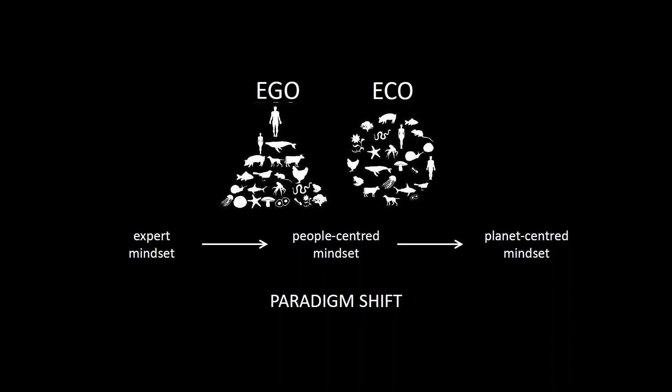And I just wanted to say that in this way, if we make a shift from the people to planet-centered mindset, it's also a way for all of us to survive on this planet. And this paradigm shift is really urgent and necessary. So this is it from my side.

And if you have any questions on how to implement the people-centered or planet-centered mindset in your projects or development of solutions, please ask now, or we can answer your questions at the end of our presentations. Thank you very much.

Okay, so good morning to all. I'm Cristina Becchio. I'm a researcher and I work at Politecnico di Torino in energy fields and also in indoor environmental quality fields. In order to present the methodology that we use in the Mobistyle project, I think I'll start from the last point that Dan stressed to us.

One of the main features of the Mobistyle project is the multidisciplinary approach presented in this slide. In particular, different expertise is required in the project: expertise in energy fields, in order to elaborate the relationship between energy use and occupant behavior, as well as the relation with indoor environmental quality. Expertise in health science in order to establish the relation between energy and individually based thermophysiology and other health parameters.

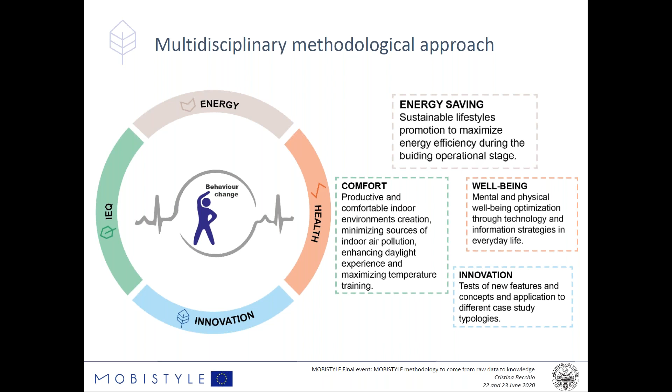This holistic approach is addressed to develop an effective methodology that combines three main research areas: energy, indoor environmental quality, and health. To stimulate users to perform more conscious actions, a combination of data collection, data analysis and elaboration, and tailored information via feedback to the user should be provided.

So these figures show the steps of the methodology. First, we have data collection to investigate the operation of users on energy systems in buildings. Then we have data analysis and elaboration in order to depict and understand human behavior, especially related to energy, comfort, and health, in order to obtain some performance indicators.

And then finally, we have improvement in terms of energy saving and indoor environmental conditions, and also human health and well-being is achieved through behavioral communication strategies, the so-called awareness campaign. So we have a new awareness. All of these steps are possible thanks to the development of new key performance indicators, the so-called KPIs, and also new ICT tools that are used to provide the information to the different users in the different demo cases.

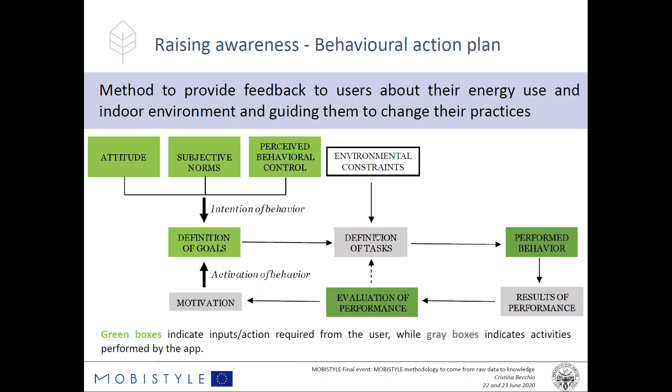One of the core activities of the Mobistyle project was the elaboration of the methodology that could translate monitoring raw data into knowledge for the user via feedback. Feedback which promotes healthy behavior, improves the lifestyle, indoor environmental quality, and energy efficiency. This is possible through the definition of meaningful KPIs, meaningful for the user, and also tailored behavioral action plans. In particular, the behavioral action plan definition is based on the main drivers of behavior according to the TPB, the theory of planned behavior: attitude, subjective norms, perceived behavioral control. So behavioral change goals are defined, and then personalized short-term objectives are translated into actionable tasks to be performed by the user. Actionable means that there is a behavioral change.

So in this way, data coming from the building, and in particular from sensors and from the users, are transformed into useful KPIs. These KPIs are translated for the users into meaningful and easily understandable information. At the same time, some variables calculated from monitored raw data are used to generate feedback to the user in terms of actions that they have to do. So users are encouraged to improve their behavior, to behave more consciously and to be proactive users of their buildings. So as an example, here we have the behavioral action plans for the Italian case studies, because we have a different behavioral action plan for the different demo cases in the Mobistyle project.

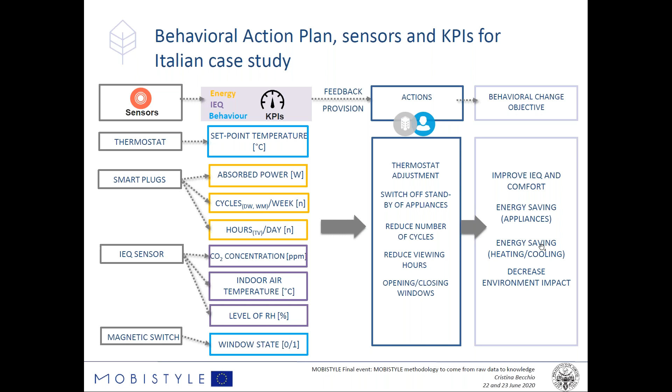So in the Italian case studies, we have information from sensors that are used to calculate the different KPIs in terms of energy, indoor environmental quality, and occupant behavior. These KPIs are used to provide feedback to users, and this feedback is translated into action in order to obtain the behavioral change objective. For example, the sensor is a thermostat, so the KPI is represented by set point temperature. Feedback provision tells the user that some thermostat adjustment is necessary. So the behavioral change objective in this case is to improve indoor environmental quality and comfort of the occupants, but also energy savings in terms of heating and cooling.

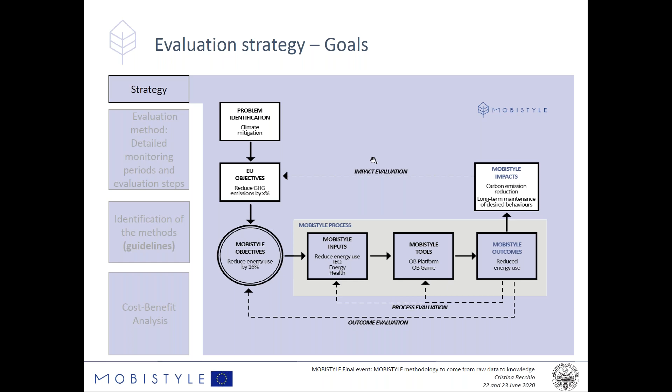So the other core activity of Mobistyle was the definition of the evaluation strategy that is shown in this slide. The evaluation strategy consists of three main phases: the outcome evaluation, the process evaluation, and the impact evaluation, which represents the last step. So here we have the timeline of the project, which is characterized by three different moments of monitoring. M0 represents the initial monitoring phase. After this, we have the benchmark definition, so the baseline definition in terms of parameters and KPIs. Then we have the second monitoring phase, in which we have feedback provision. At the end, we have an intermediate evaluation of the outcomes of the project. And then we have another monitoring phase, M2, in which we have optimized the feedback provision.

And at the end, we have the final evaluation. So the outcome evaluation assesses the effectiveness of the awareness campaign, as described before. The final objective of the outcome evaluation is analyzing the energy saving obtained in the different Mobistyle demo cases and quantifying their environmental impacts. This consists in a comparative analysis of the specific KPIs that are defined in the benchmark

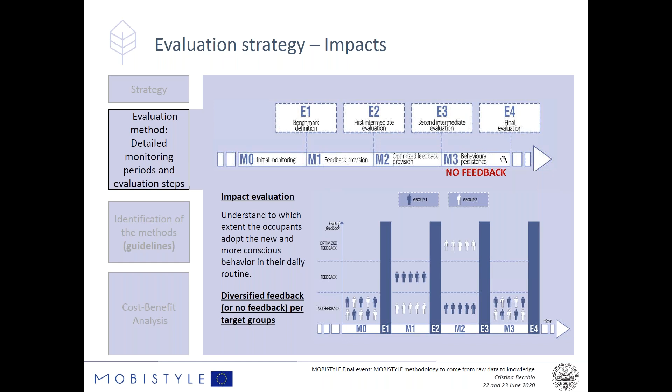So unfortunately, due to the COVID-19 spread, it's not possible to develop this last phase of evaluation. So we ended with the evaluation E3 as a final evaluation, as shown in the timeline of the previous slide. In order to develop the evaluation in terms of feedback, different descriptive statistics are used in order to quantitatively describe the current performance of the different case studies in terms of energy, indoor environmental quality, health, and behavior.

In order to assess the impact of the Mobistyle project, a cost-benefit analysis was developed. This is important because the assessment of human-centered intervention related to the use of energy consists in going beyond the energy savings that is the objective of the project, through the identification of all the market and non-market effects that the proposed ICT solution can generate. The cost-benefit analysis consists in defining, quantifying, and monetizing the impacts generated by the project. Thanks to the cost-benefit analysis application, also co-benefits are included in the evaluation. So the co-benefits represent the benefits referred to the society.

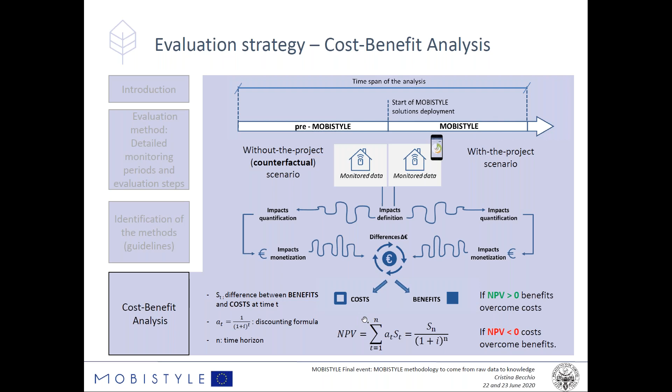So starting from monitored data of two equally long and comparable periods in pre-Mobistyle and Mobistyle period, impacts are quantified and monetized in the two different scenarios in order to compute their differences. So depending on the sign of the differences, extra costs due to Mobistyle or benefits gained thanks to Mobistyle are defined. So at the end, we have the calculation of the net present value. This indicator is calculated in order to assess the economic benefit brought by the project and so the effectiveness of the ICT tool that provided feedback to the users with the aim of changing their behavior in a persistent way.

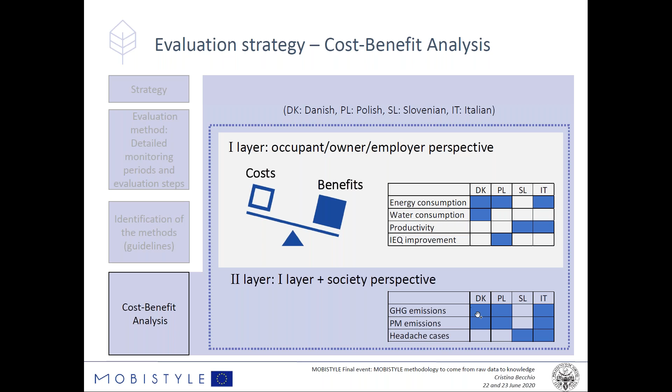In particular, four different cost-benefit analyses, tailored for the different demo cases, were developed. In particular, we have two layers of analysis. The first layer represents cost and benefits for the occupant, owner, and employer perspective. The second layer represents the perspective of the society. So, for example, in the first layer we have energy consumption that represents a cost or a benefit if we have a saving comparing the with-the-project scenario and the without-the-project scenario. The second layer represents the society perspective, and so, for example, we have the calculation of greenhouse gas emissions in order to understand if we have saving or not.

So, in order to close this presentation, in this final slide, I try to summarize the main aim of the project. So, the persistent behavioral change in the user.

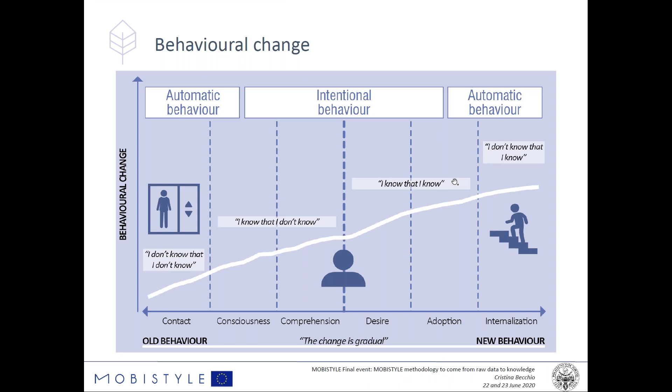Okay, so let's see. It doesn't shift, does it? Now I'm back to, oh, it's a bit slow.

Yes, here we are. So we should not forget that we evolved in more natural conditions and that we still are dependent on our environment. One way we cope with our thermal environment, with the temperature around us, is by behavior. And one of the main things we achieved by behavior is building microclimates, building houses, the built environment.

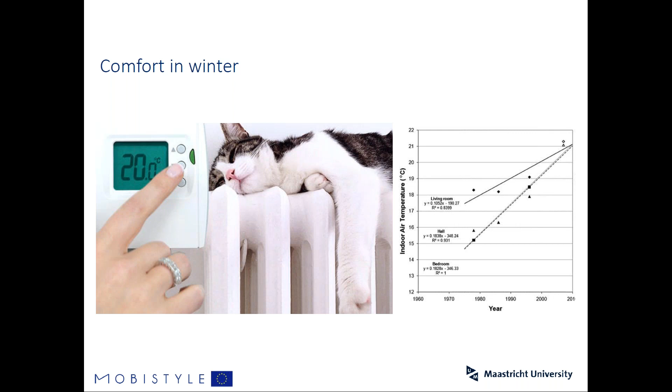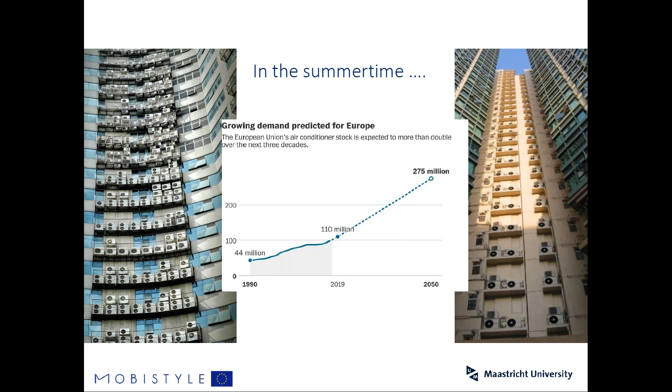And this is in wintertime, but in summertime, we're getting more and more fixed temperatures as well. And this has huge implications for the energy consumption in buildings. Here you see some of the expected growth in air conditioning. It's really something we should try to avoid. And one way to avoid this is to have more exposure to different temperatures, that's to say, to get into a dynamic environment.

I come to that. Parallel to these changes in comfort conditions, we see a huge increase in the metabolic syndrome, which is really linked to our westernized society, our Western behavior and comfort conditions. And that is not only, of course, temperature. Very important is our food intake and our physical activity. But anyway, it links to lots of metabolic diseases, from cardiovascular to diabetes, etc.

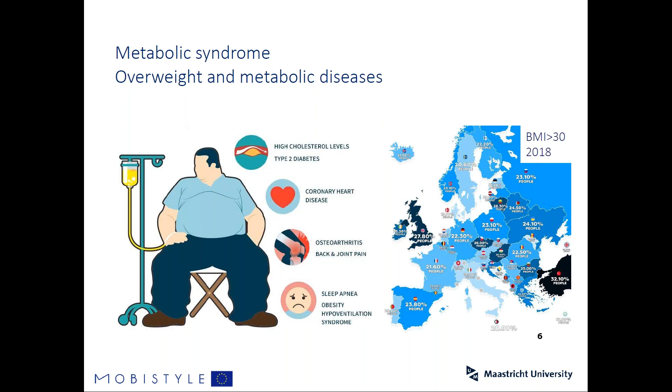So you can try to avoid overweight and related diseases by doing something about our energy balance. We get energy inside the body, and I'm really talking about the energy of the human. So you can do something by eating less or expending more energy through a higher amount of physical activity. And that energy balance is then linked to the weight balance.

I think this is clear to everybody, but not so clear is that you can also do something about it by looking at your thermal environment and expend more energy by being outside of your thermal comfort zone. I'll come to that in a few slides.

So we look now more and more at other lifestyle factors. Of course, the most important lifestyle factors are still food intake and, let's say, physical activity, but others like the ambient temperature is also an important one, we believe.

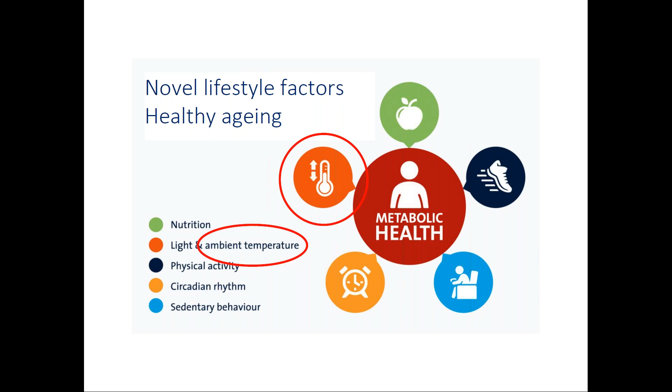So just 1 or 2 slides about the thermal physiology. I think that's important in order to understand that the human body has its own heat production. That's our metabolism. And of course, you need also to get rid of that heat, otherwise you would get higher and higher core body temperature. So the heat balance is important to achieve 37 degrees Celsius in our body.

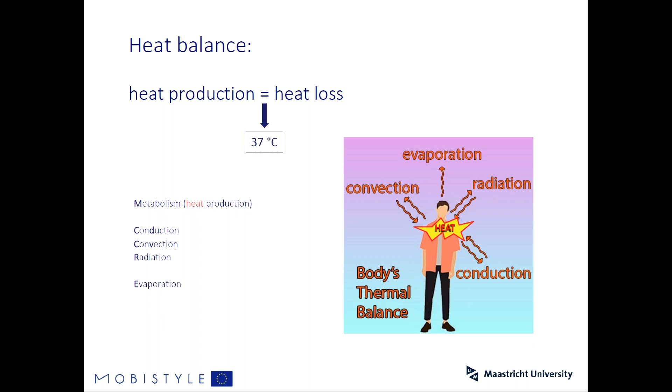Very important here is that we can have different means of regulation, and a cheap way to regulate our body temperature is by changes in the heat loss. So that we can do by more blood to the skin or less blood to the skin. So we change the blood perfusion, and that is for the body a cheap way. It does affect our cardiovascular system, so it is important. It has a cardiovascular challenge, so it's good to have some changes in perfusion, but it doesn't cost us extra energy, so our metabolism is not so much affected.

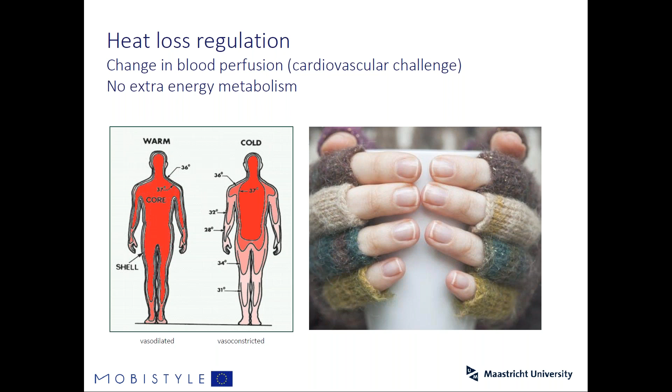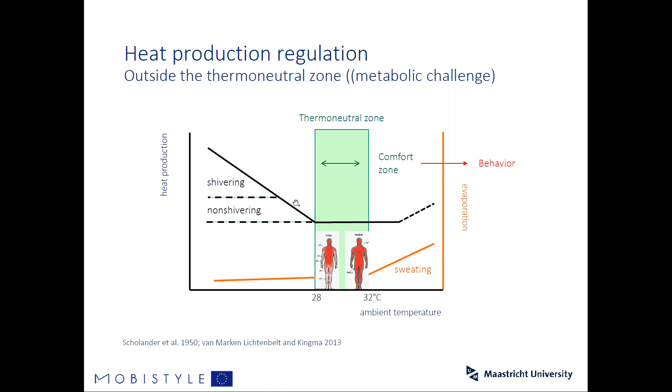So there are 2 ways to really affect your health in the body: by metabolism increasing and by changing the perfusion. So is comfort that good? Well, in natural circumstances, yes, of course. You had to save energy because there was not food available when we lived in the savannah in Africa. So we had to save on water and energy, and that comfort drives then our thermal behavior. But nowadays, in our modern society, everything is there. We don't need to have a lot of physical activity, and we're always in the same temperature. So now a slight discomfort may increase our metabolic rate again and get into more natural and healthy circumstances.

And moreover, very important, I didn't stress that, is the resilience is also increased by being exposed to slight temperature changes. So acceptable temperature changes also creates more resilience to more extreme conditions like heat waves. So we did a lot of research in Maastricht. We have special metabolic chambers, climate chambers, where we can measure the human energy metabolic rate in great detail.

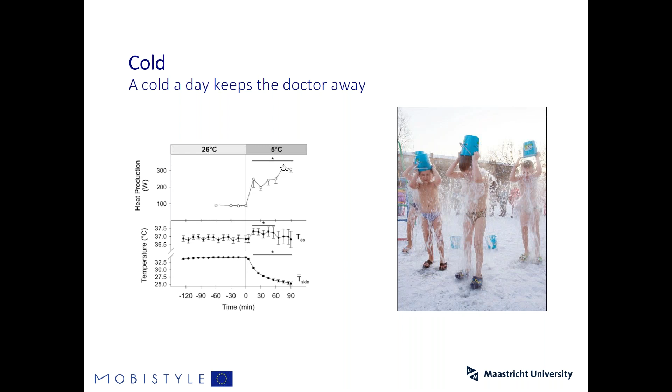So if we look at the cold, we can, for instance, increase our metabolic rate, as you can see here. We also change the perfusion in the skin. You see here the skin data. The details are now not that important, but with shivering, you can increase up to 5 times your metabolic rate. In this case, it's 3 times. But that's, of course, not so comfortable. But it's also possible, as you can see here, that prior to shivering, there's also non-shivering increase in metabolic rate. And that is rather comfortable.

And we also found out which tissue is important, because with the shivering, it's the skeletal muscle. But with non-shivering increase in metabolic rate, it's the brown fat. And we found out that humans have quite a bit of brown fat, and that's a very healthy tissue. It keeps us warm in the cold without being uncomfortable, and it is linked to a better metabolic profile.

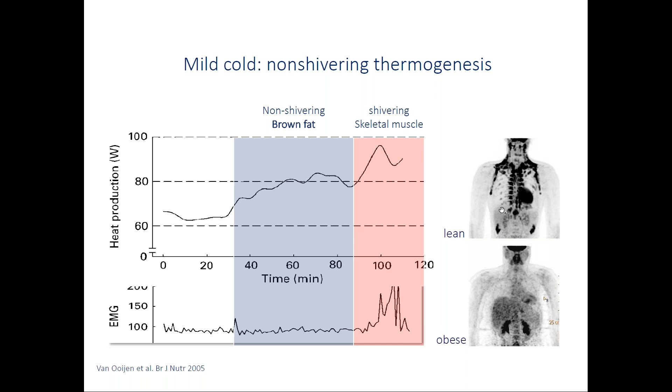So to make a long story short, because we did a lot of studies on this, we found out that if you're regularly exposed to mild cold, in this case 15 degrees Celsius, it's maybe not what we want in our offices, but just as an example, we see that we get an increase in this healthy tissue, the brown fat. And we see that the glucose metabolism is much better. The insulin sensitivity increases. So that's good news for diabetes.

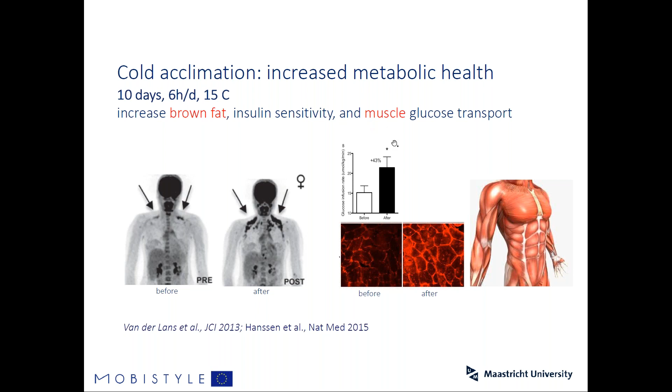And we see that also the muscle is involved in this. So it's really a systemic, whole body metabolic profile that is increased. So we see a lot of parallel with exercise. We all know that exercise is healthy, but we also have enough evidence now that being exposed every now and then to cold is also good for your metabolic system.

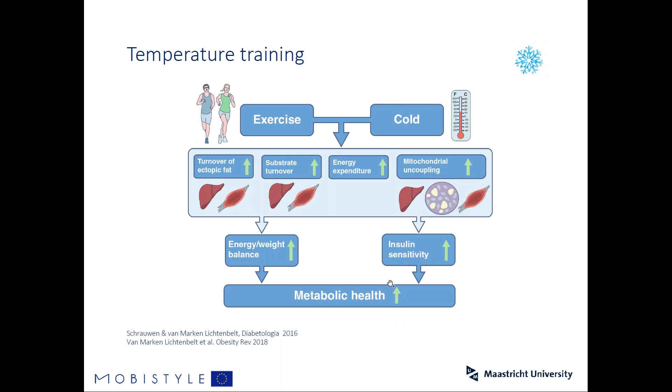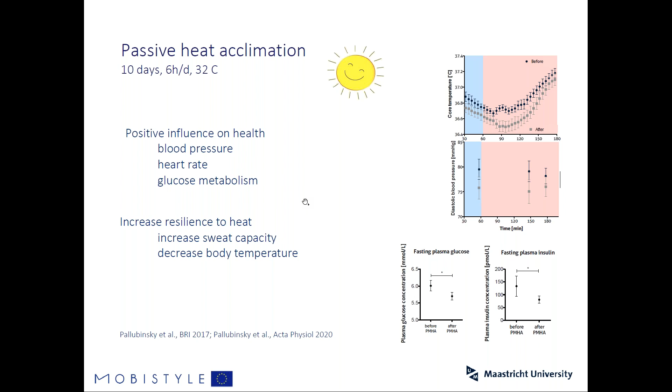So all in all, we believe that the dynamic profile, being exposed sometimes to the heat, sometimes to the cold, is healthy. And that poses a huge number of interesting options for the built environment. That means that you don't need the strict fixed temperatures inside our buildings and offices that normally are achieved. No, you can just drift along with what happens outside and create a much healthier environment, and save a lot of energy in the built environment.

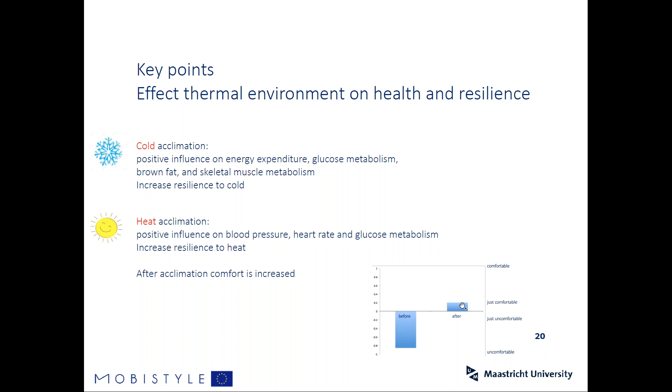This is to summarize what I just mentioned. You can have a look at it maybe later on in more detail. What's also important is that if you get used to the heat or the cold, you see that the comfort also increases. In the beginning, you really have to get used to it, but gradually, within 10 days, you're used to sometimes being exposed to the heat and sometimes being exposed to the cold. So now this is some of the background that I just mentioned. I think it's important to realize that we are biological systems and that we are connected to our environment.

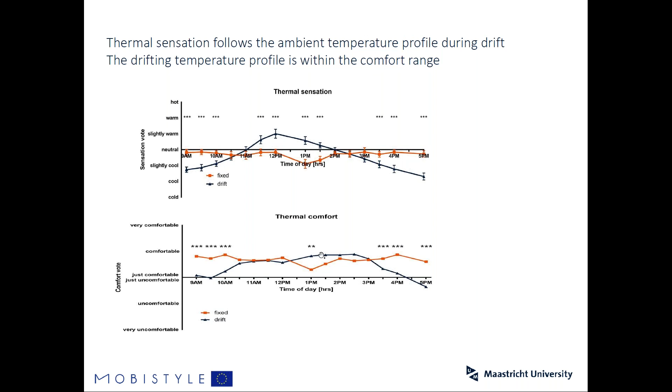You can imagine that people, when it's cold, feel colder, so slightly cool in the morning, for instance, here. But very interestingly, we see the thermal comfort was all within the acceptable range, from just comfortable to comfortable. And even in the drifting condition, at midday, you see an increased comfort compared to a fixed environmental temperature. So thermal comfort was really maintained in both conditions, also in the dynamic condition. So in general, we can say, yes, there is a slight increase in metabolism in the drifting conditions, and in general, the temperature ramp is voted as comfortable.

And we really wanted to evaluate whether such a dynamic or drifting ambient temperature can be achieved and how it is experienced. And we again compared the drifting with the fixed temperature. So they were exposed for 1 week with the fixed and 1 week with the drifting temperature.

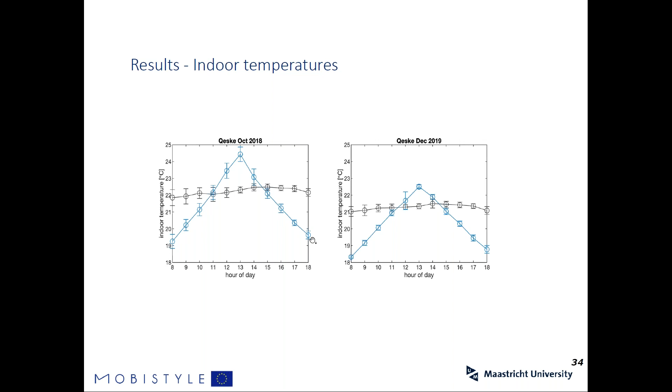So here you see some of the results. Sorry, there's no legend here, I see. So we see here the indoor temperature during fixed in October 2018. So we had 2 measurement periods, and we had December 2019. And again, the fixed temperature, and the drifting temperature, you see here, going up, going down. So the drift was well achieved.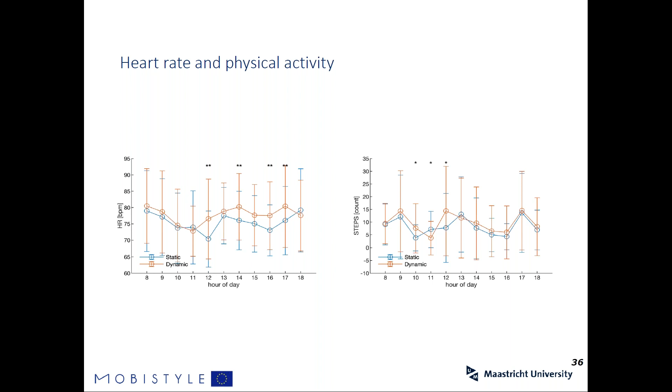So the conclusion from this small real life living lab study, I mean small, it was not with that many people, but still interesting: the temperature manipulation, we could accomplish that. The body temperature follows the drift, but not, as you saw, in all the subjects. And the thermal comfort is achieved in both conditions.

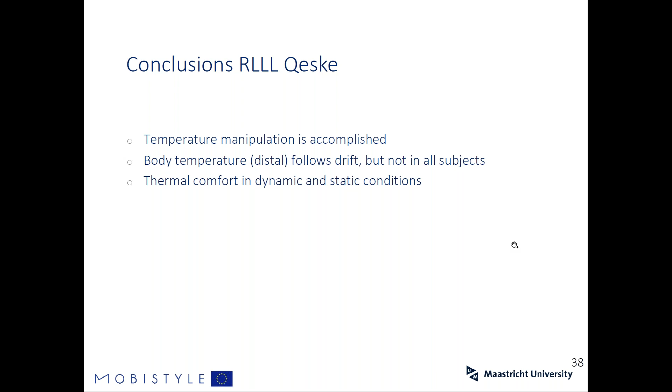We did also a test in the Huygen Brightlands office with, in fact, the same study objective as we had in the Qeske, although they also used another control system and subject information system that will be shown tomorrow by Loes Visser. But here I just show how people respond to the dynamic condition. Here you see again the static condition, the fixed condition, and here's the temperature of the dynamic condition. And in this case the range was a bit less than in the Qeske. It's only a few degrees variation.

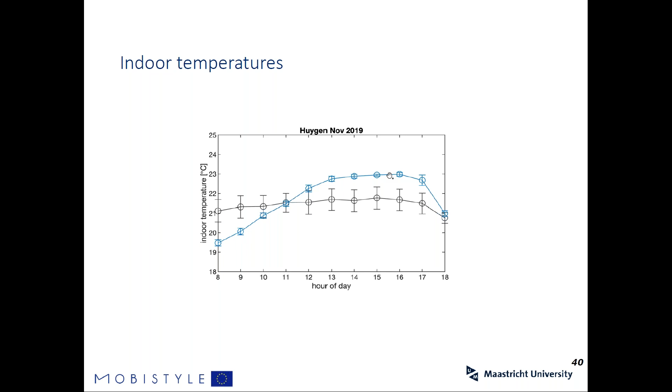And that's the main message, I think, from these studies, that the moderate temperature drift does not lead to thermal discomfort, and that the lab studies reveal a significant increase in metabolism and physical activity. So yes, there is a metabolic challenge. The skin temperatures follow the drifting temperature conditions, so there is a cardiovascular challenge. So that really shows the potential of a dynamic indoor environment for our health, but also a potential for saving energy. We're currently doing the last calculations on that, and that will be shown in the final report.